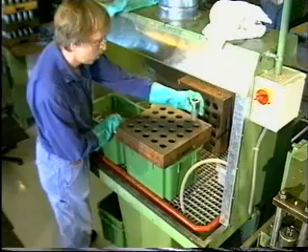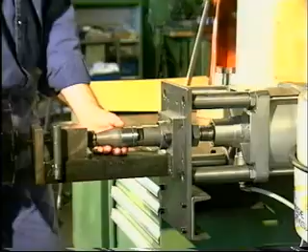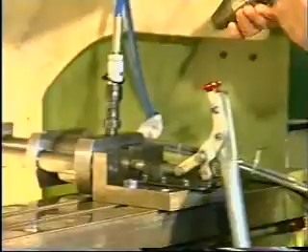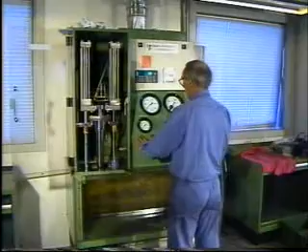All spindle guides are function tested before they are delivered. All fuel valves are assembled and function tested before leaving the workshop.

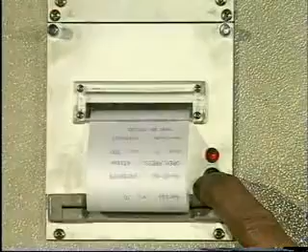Overhauled fuel valves or fuel valves taken from stock must be function tested before they are mounted in the cylinder cover. The pressure testing pump is equipped with pressure gauges for displaying opening pressure, working pressure, venting function and air inlet pressure.

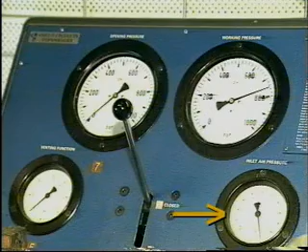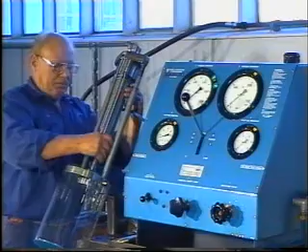Position the fuel valve in the test rig. For guidance on how to operate the pressure testing pump, refer to the supplier's special instructions.

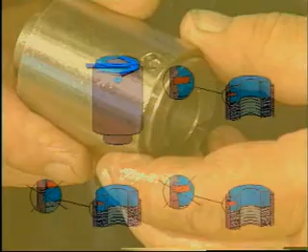To ensure that over-tightening has not taken place, check that the locking and indicating pins have not been bent or broken off. In the event of over-tightening, mount a new spring housing.

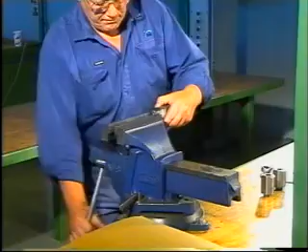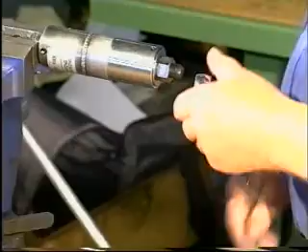A very important element in the correct functioning of the fuel valve, both during testing and in service, is ensuring that the spring housings apply the predetermined tightening force. To ensure that this force is present, a special tool has been designed to check the calibration of the spring housings. We recommend that the calibration of new and especially old spring housings be checked before they are mounted on the engine or on the fuel valve test rig.

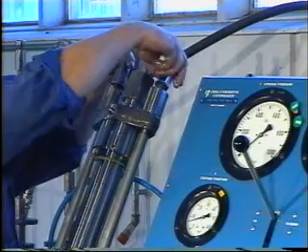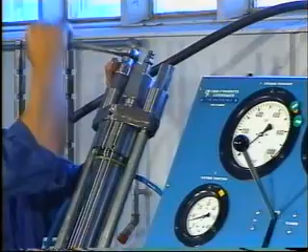Tighten the nuts until the top face of the pressure disc is flush with the top face of the spring housing.

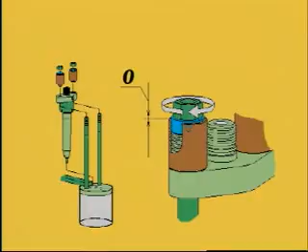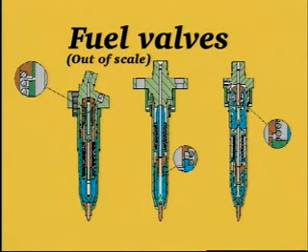Fuel valves are available in 3 different designs depending on engine size. Refer to your instruction book to see which valve is to be used on your engine. The pressure testing procedure is the same for all types of valve.

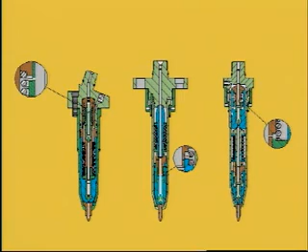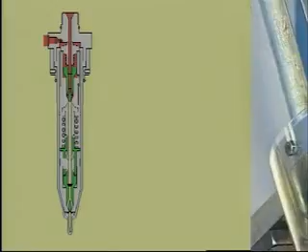Slowly fill the valve by pumping at low pressure until fuel oil, without air bubbles, flows from the fuel oil return pipe. Raise the pressure until it is above the opening pressure.

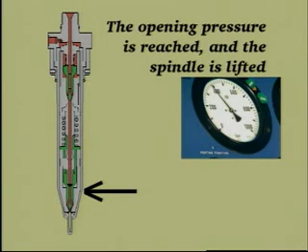Flush the valve for about 5 seconds.

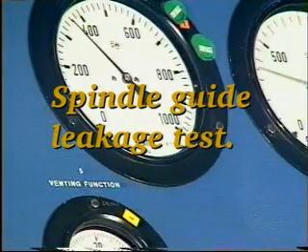There will always be a certain amount of fuel oil flowing from the fuel oil return pipe when the fuel valve is full of fuel oil and pressurized.

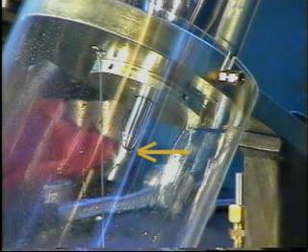Fuel oil must not seep from the fuel valve nozzle holes until reaching a pressure of 50 bar below the specified opening pressure. If the fuel oil does seep from the fuel valve nozzles, see Instruction Book, Volume 2, Chapter 909.

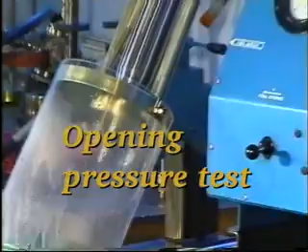Pump 5 to 10 strokes to fully open the valve and to blow out any dirt. Then relieve the pressure.

Slowly increase the pressure until fuel oil is emitted from all the atomizer holes. Read the actual opening pressure on the pressure gauge marked opening pressure.

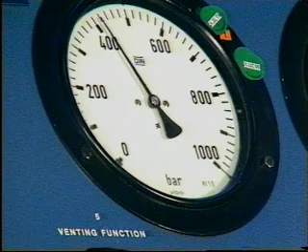Compare the actual opening pressure with the pressure specified in the Instruction Book, Volume 2, Chapter 909, and, if necessary, adjust the pressure by inserting or removing discs.

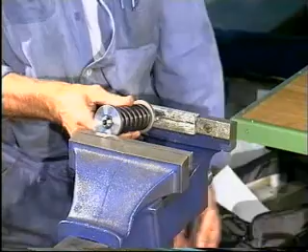Set up the thrust spindle in a bench vise with soft jaws. Compress the spring for the thrust spindle to remove the tension on the circlips, and then remove the circlips.

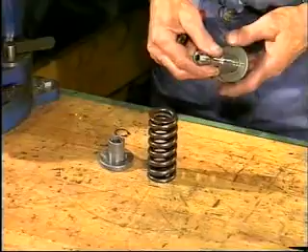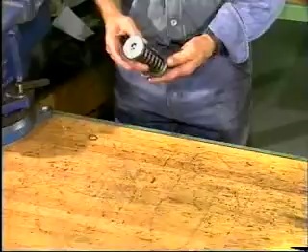Do not insert more than 5 extra discs when adjusting the pressure. The sum of the pressure markings on the extra discs must not exceed 150 bar. The fuel valve must be retested after any adjustment.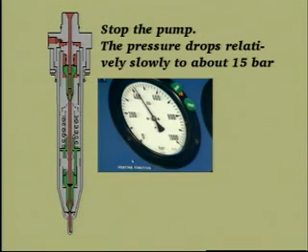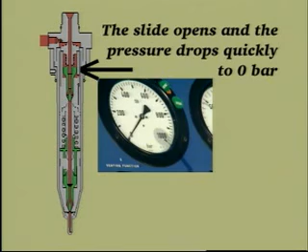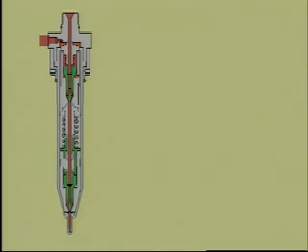If the quick pressure drop cannot be registered, the slide is sticking, or the hole is blocked. Disassemble and examine the parts, replace if necessary.

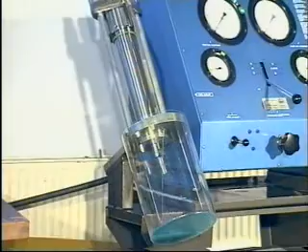Slowly fill the valve by pumping at low pressure until fuel oil, without air bubbles, flows from the fuel oil return pipe. Remove the fuel oil return pipe and block the outlet hole with a gasket and a plug screw.

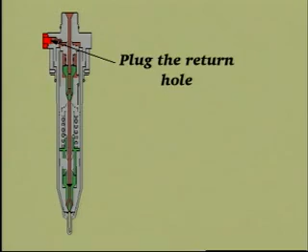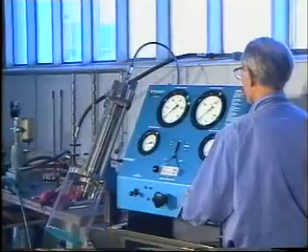Increase the pressure to about 100 bar and move the control handle to the closed position. The pressure should now remain at 100 bar.

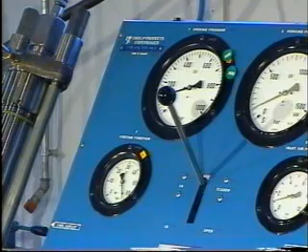If oil leaks at the union nut, replace the O-ring seal of the valve head. If oil leaks at the lower end of the valve, replace the O-ring seal on the spindle guide. After the fuel valve has passed all the tests, it can be mounted in the cylinder cover.

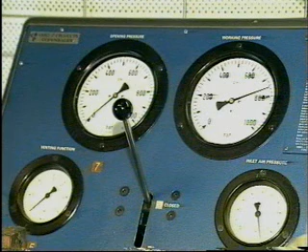The main objective of the normal tests shown in Part 3 of this film is to ensure that the valves function at the correct opening pressures and that they seal tightly. As the injection capacity of the engine fuel pump is much greater than that of the pressure testing pump, atomization will be ensured during service, provided that the fuel valve passes the normal tests.

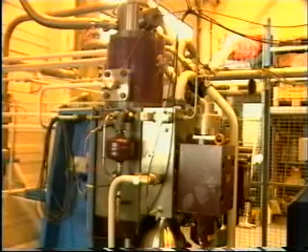The computer-controlled injection system, which is able to simulate the injection into a diesel engine, comprises a high-pressure booster pump, a servo fuel pump unit, and a computer control and monitoring system.